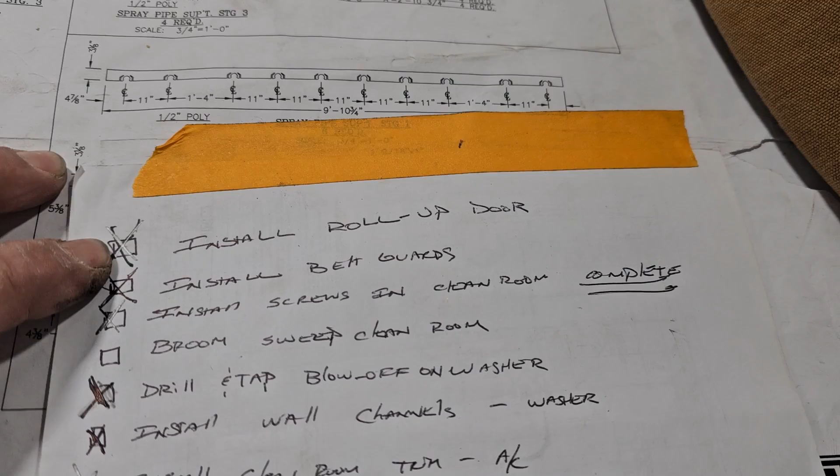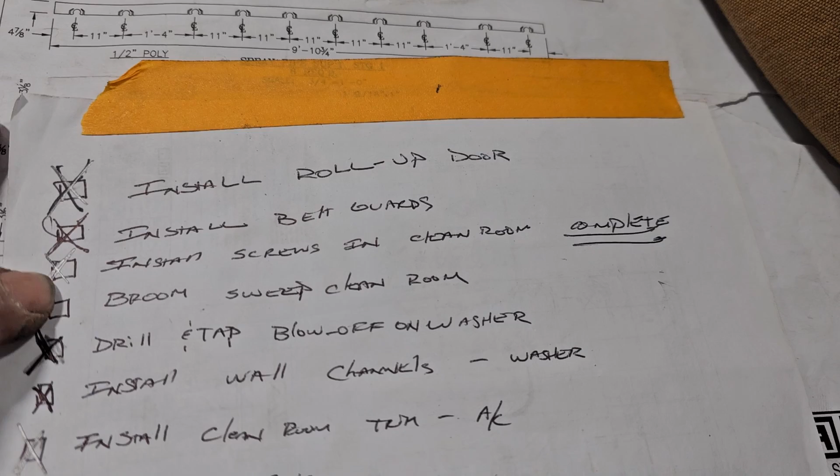And show you what the light at the end of the tunnel looks like. Well, here's one of my punch lists. You give them a square box to check off. Install roll-up door - check it off when you're done. Install belt guards - check them off when you're done. Screws and trim screws in clean room - complete. Broom sweep clean room - see, that hasn't been done. Drill and tap blow off washer. Blow off on washer, install wall channels, blah blah blah. It just goes on and on.

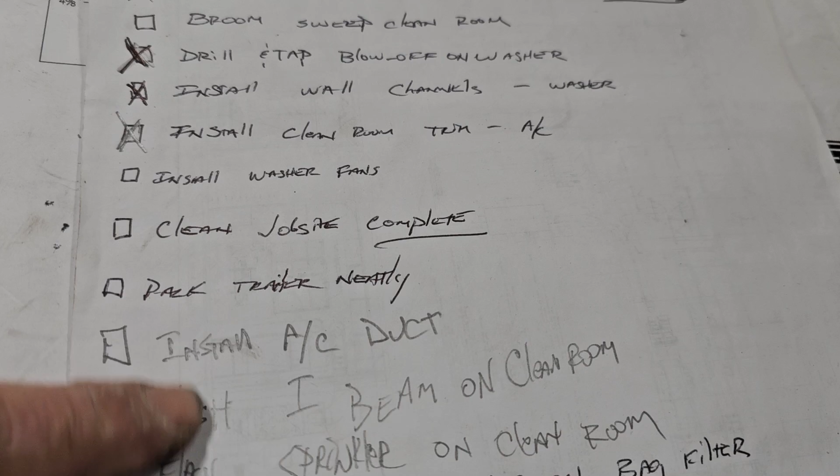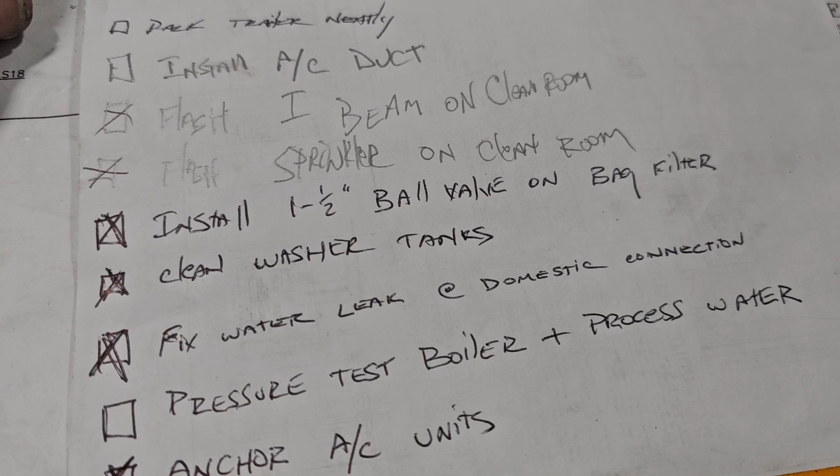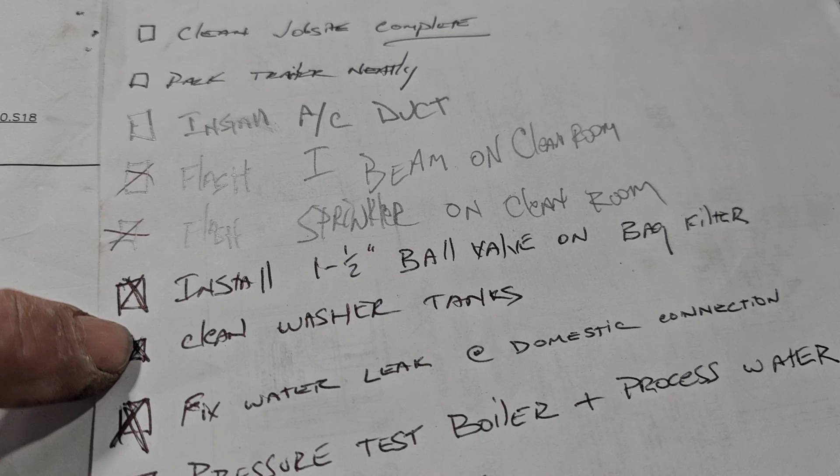And see, we add to it there - we added a couple other things. Install the AC duct, flash the I-beam on the clean room, flash the sprinklers on the clean room, install a ball valve that we forgot to put in, pressure test boiler in process - that's in process right now. Anchor AC units. We had a water leak at the domestic water connection we had to fix. We had to clean out the washer tanks, make sure they were devoid of screws, metal chips, and plastic shavings. So there's a lot of little things we had to do.

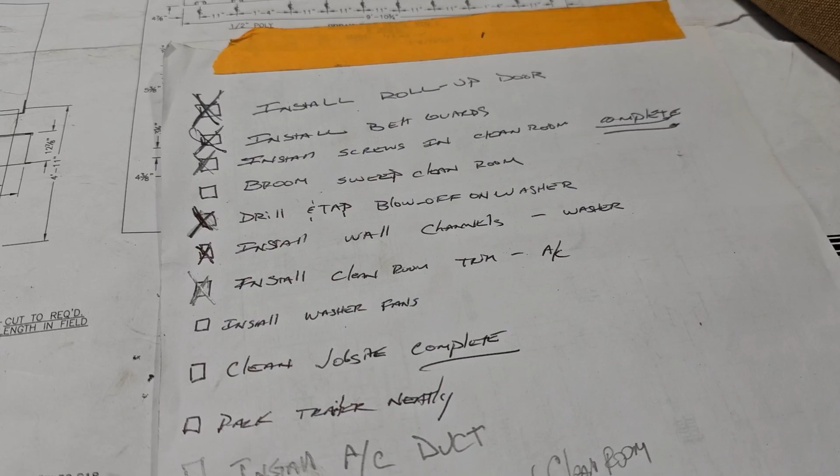So we're doing startup this week. That's how we start punch listing. But this is subject to change - I won't hesitate to add a line if I find something that needs attention. I'll add a line.

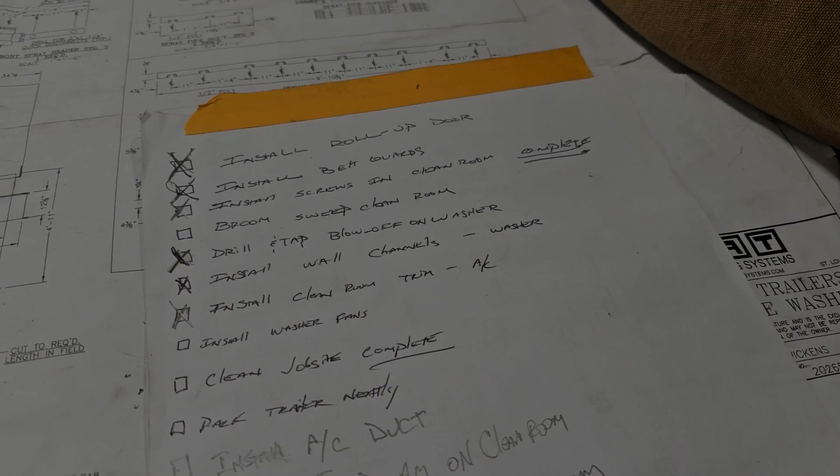Well, let's go take a look at a washer real quick. I'm going to show you what a washer looks like when it's running. We did start it - here's a little video clip of that.

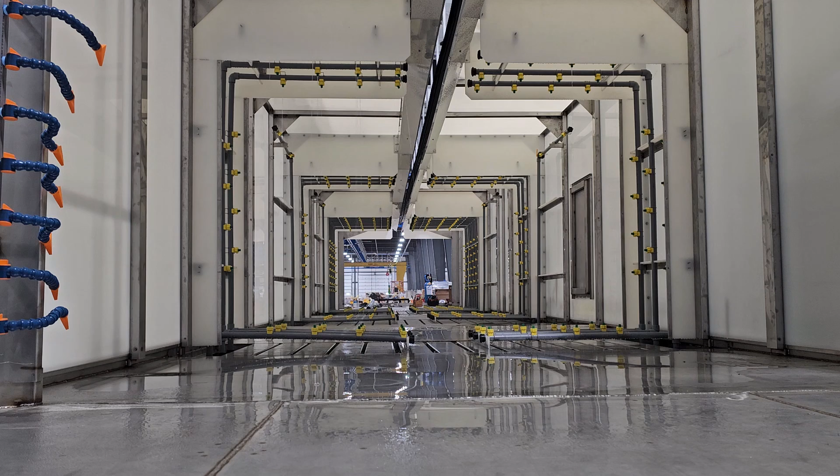You got a clogged nozzle already. Left side, in by the end cap, far nozzle. See it peeing? Yeah, the one closest to me is a little clogged too. Did you fill tank 2? We got water in tank 2? Okay.

There she goes. Is that 30 hertz? 40? That's a little weak. Is the pump cavitating? Did the water drop a bunch in the tank? It sounded like it was sucking air. Oh, running backwards, that would cause it too - they work both ways.

And now we're going to take a walk around and take a look at the process piping that we put in. We had a little sway in the process piping. Every time a high volume of water changes directions, your pipes can move, and with PVC, it'll eventually break. Even though we use Schedule 80, a really heavy gray PVC pipe, if you got some wiggle, it's going to end up breaking.

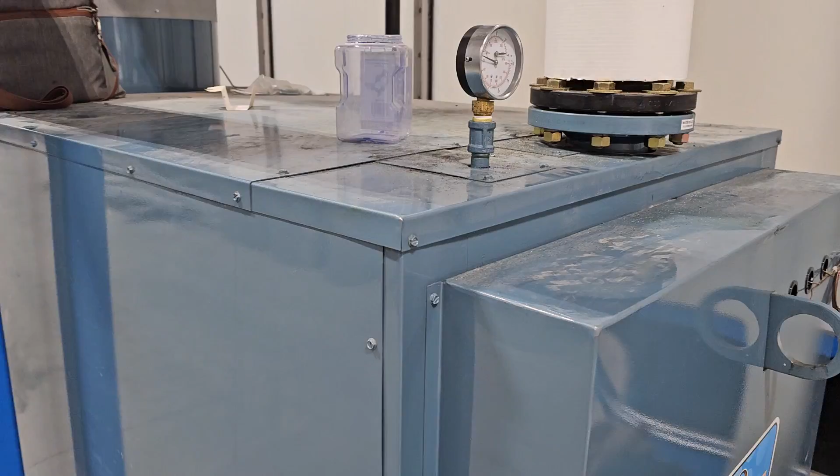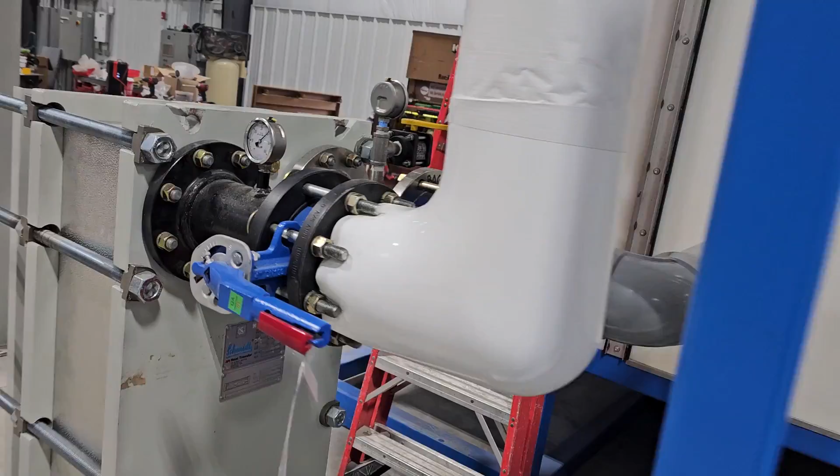So let's go take a look at how we anchored it. Okay, so we're on test here. We've got pressure in that gauge, and this is the hot side of our system. So we got pressure here, we got pressure all the way out to here, all valves are open. And we got pressure down here, valve open. So we're pressure testing the hot side. The only way to pressure test the cold side, which is the plastic over here - this is cold side - we have to start the pumps. Our pumps create the pressure in these pipes here.

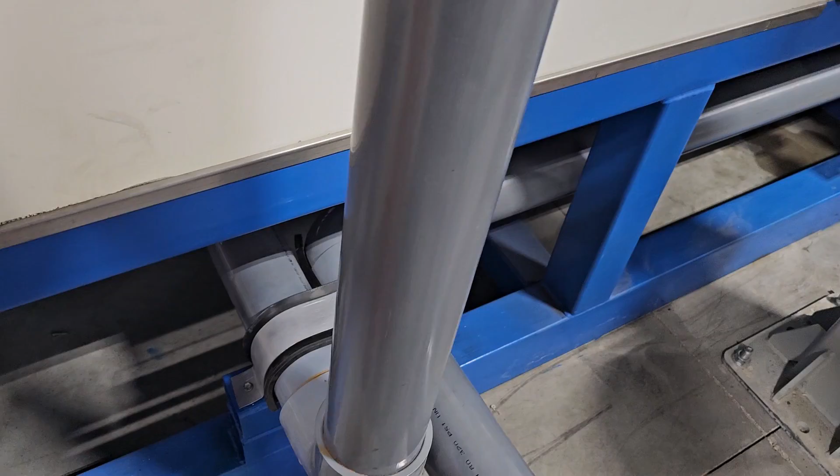But we did have some - we did start it, and we had some pipe vibration. So we made some rubber straps and stacked some blocks in there. Put a couple of square tubes in and welded them in. Some rubber strapping, same as this stuff here, and made some straps and strapped them down. We got a couple more underneath on the way across - there's two more there, and we'll walk over to the other side and show you the bag filter.

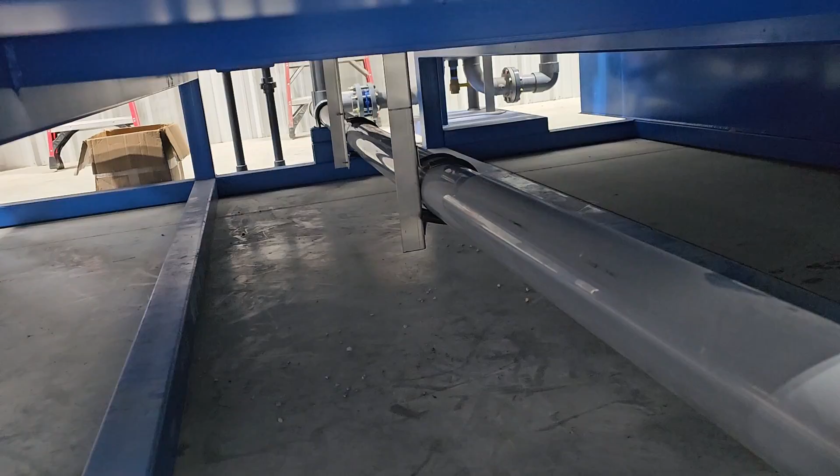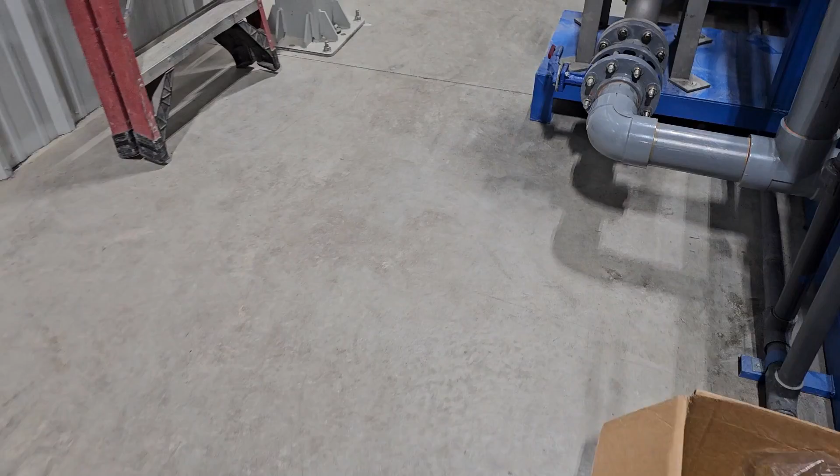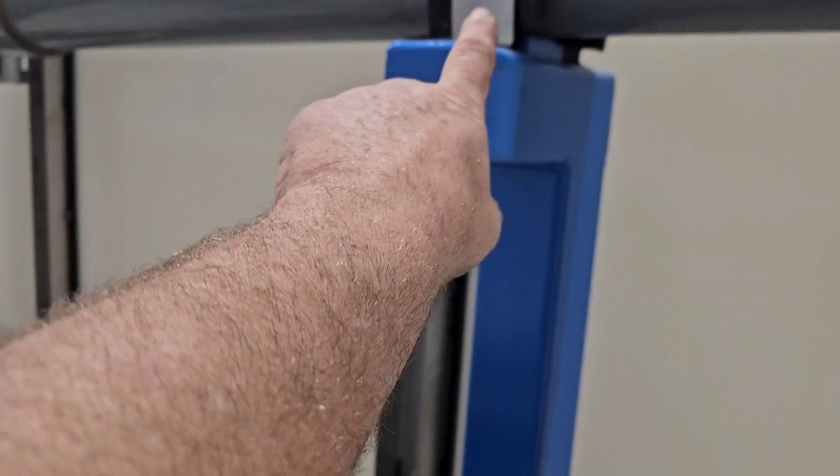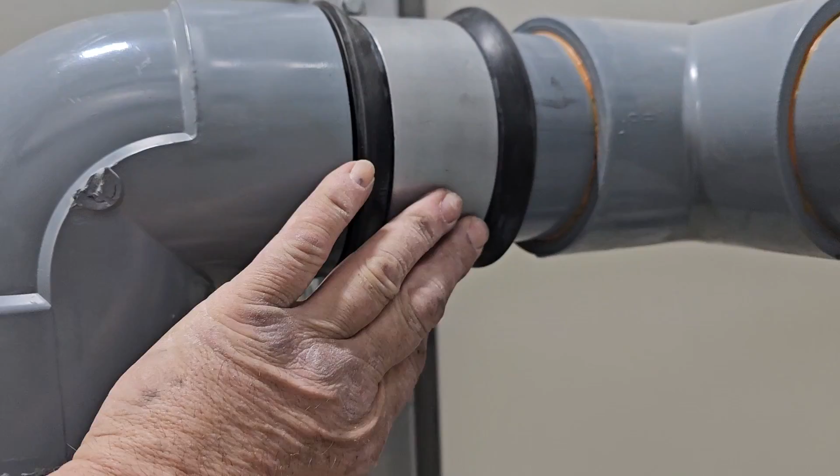There's another double stack of square tube, another rubber strap there. Got a kickstand up here, or a hockey stick, whatever you want to call it, but we put one there. And we still was getting a little bit of wiggle, so we put a couple of beam clamps back here, beam clamped it to this channel, and then we made another rubber strap there. So she's strapped down pretty good.

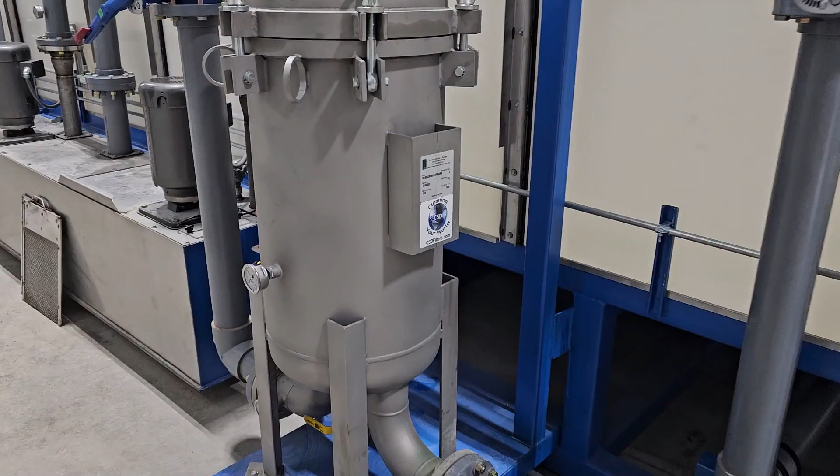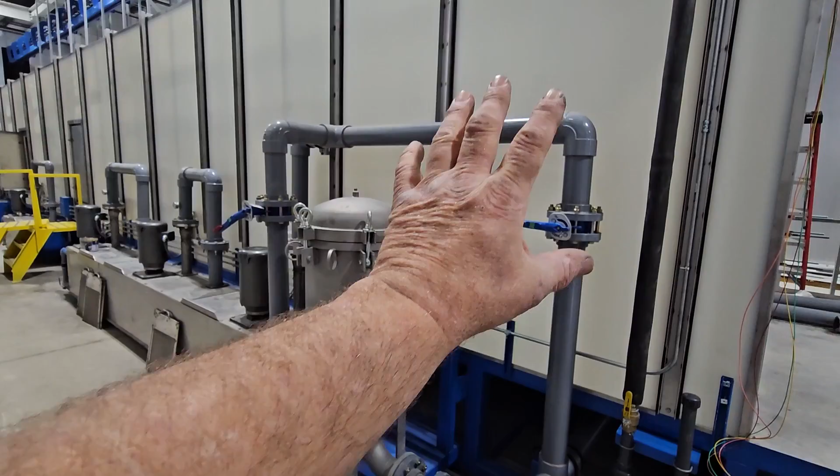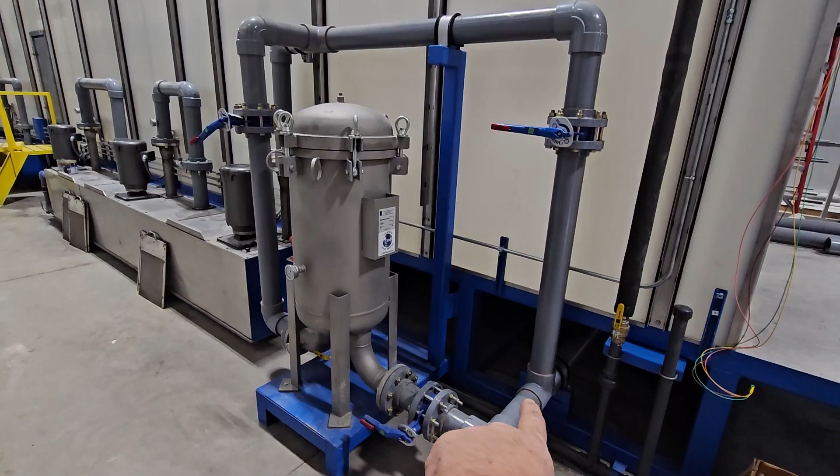Oh, there you go. But as you can see, there was a lot of overhang up here, and our process piping, when the pump was running, was moving quite a bit. Eventually you'll bust a flange or break the glue down at a flange there, or bust a T. You'll end up damaging it somewhere, and you'll end up with a leak.

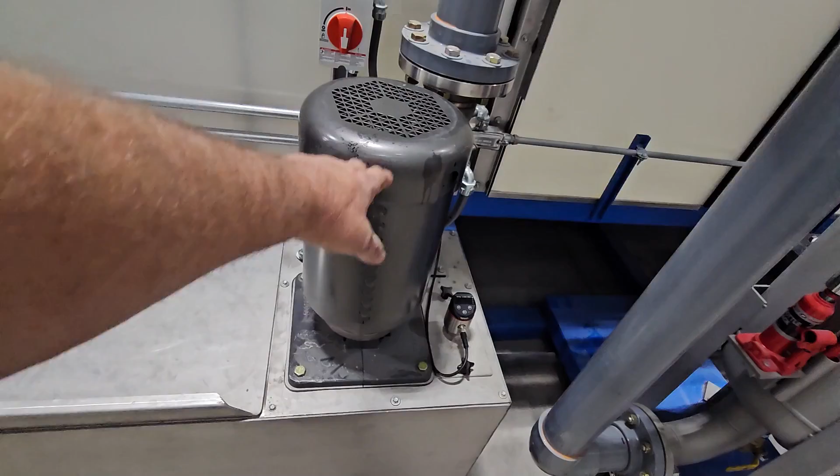But we're ready for another pressure test, and we're going to start this motor. This is the recirculation motor for the hot side, just to heat the water. So we're going to start this motor and run it probably for a couple hours and make sure we don't have any leaks. We did it. We had one yesterday. We only ran it for about 5 minutes.

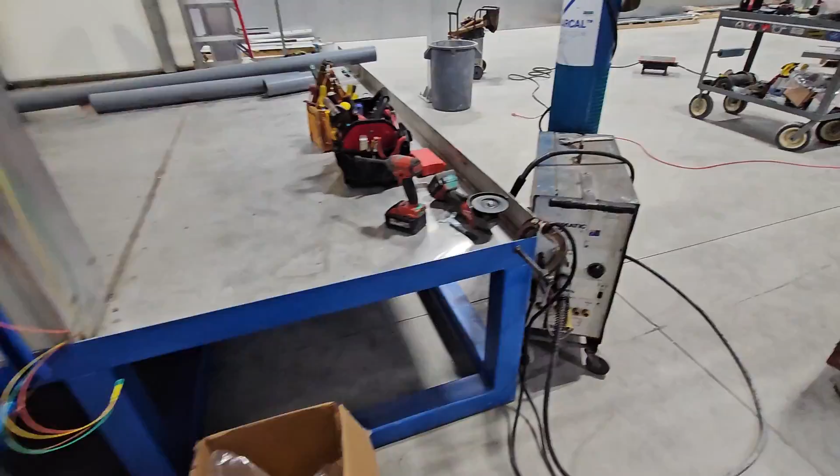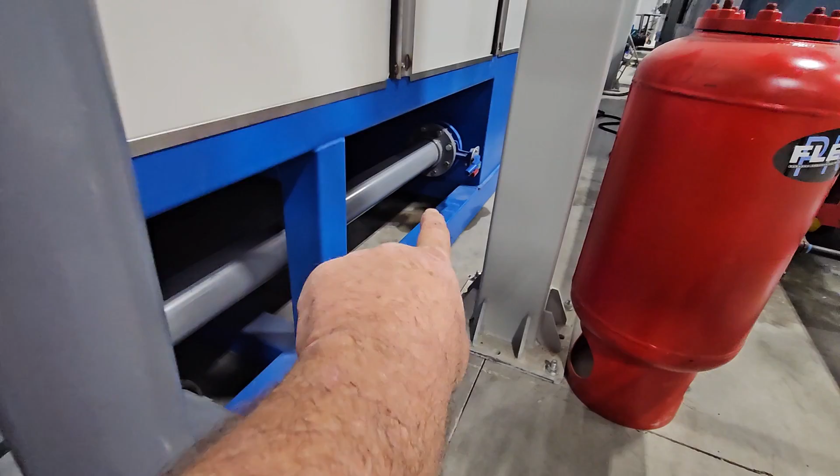We had a loose flange over at the tank. Actually, you can still see the wet on the floor, but we had that flange back there that was loose, and we had a gauge right here that didn't have any tape on it, so it stands to reason that that would leak. Those are hell to find because they drip down and run down here, then they drip down to the bottom one. You go, oh man, is it the bottom one leaking? Is it a weld? What is it?

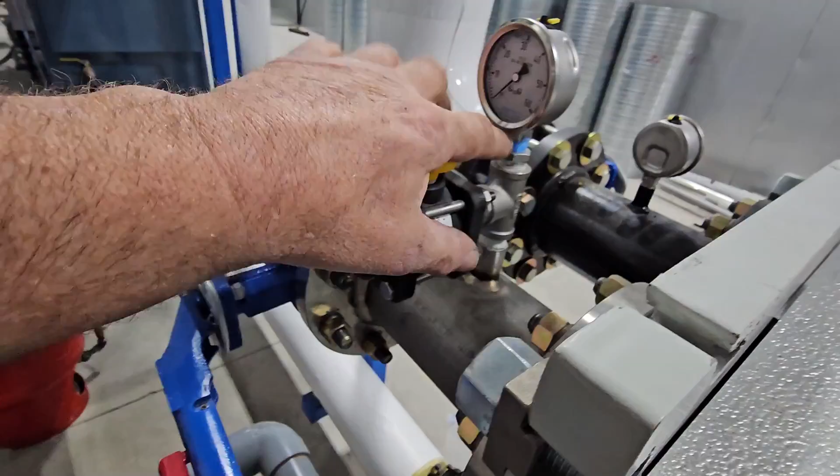So it was just the gauge was hand tight. No one put any tape on it. No one tightened it. So pressure test up next, but we got to run the pump.

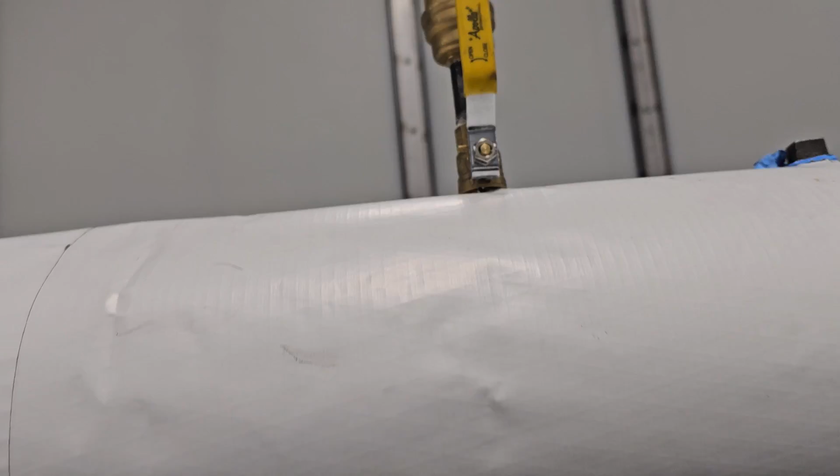Okay, so we're on a pressure test. We've got a black hose hooked up to just city water. We got a garden hose, and we brought it in, and then there's little air bleeds right here, little air bleeds all over the place, and we burped all the air out of it, and then we started this pump. This pump is currently running.

Very quiet, but pump's making pressure. And we're pulling in city water, and the pump is adding to the city water pressure. City water pressure here is about 45, so the pump adds about a 5 psi boost to that. So that's coming into the heat exchanger.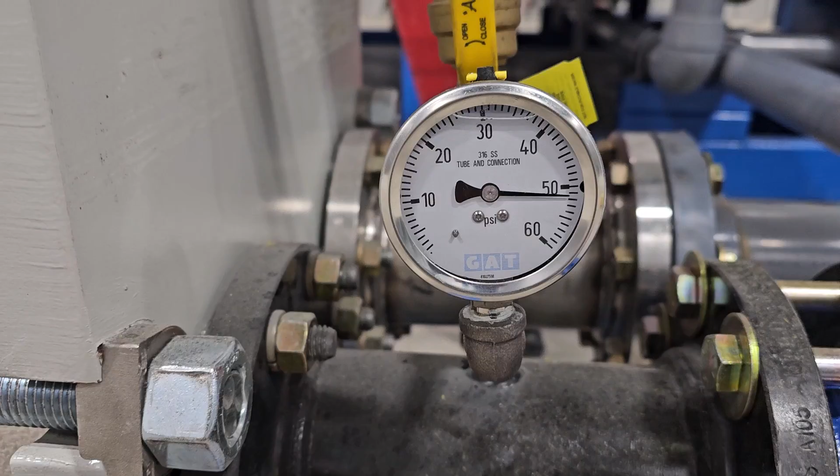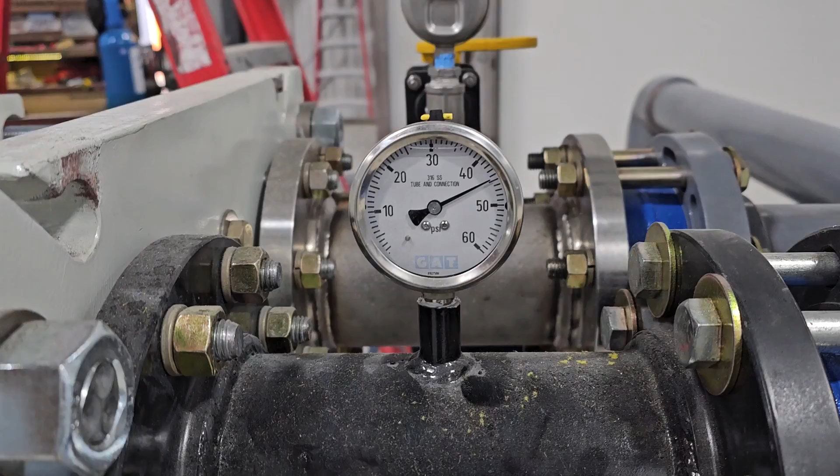We're getting just a shade over 50. I'd call that maybe 52. And then there's your pressure drop. That's coming out of the heat exchanger, and I'm going to call that 45. So you do get quite a bit of a pressure drop between incoming and outgoing. But right now we're looking for leaks.

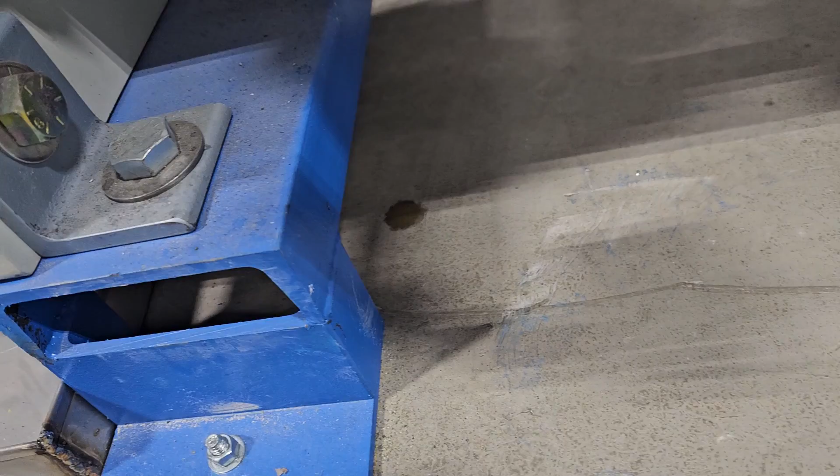If we got a leak here, if we got a bad weld fitting, if we got a bad gasket, forgot to put in a gasket, whatever, we're going to see it. We're looking for water. So like here, there's a place that needs investigating. There's one little drop there, and it might be as simple as, oh look, there's a plug there. Didn't you see it? It'd be as simple as tightening a plug.

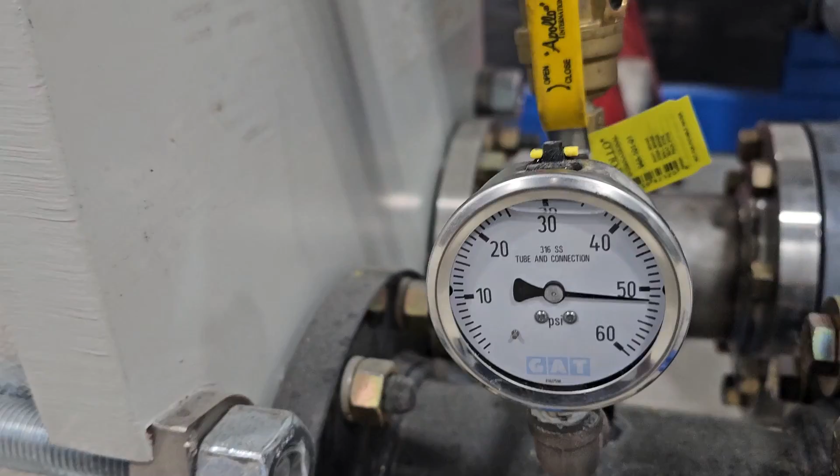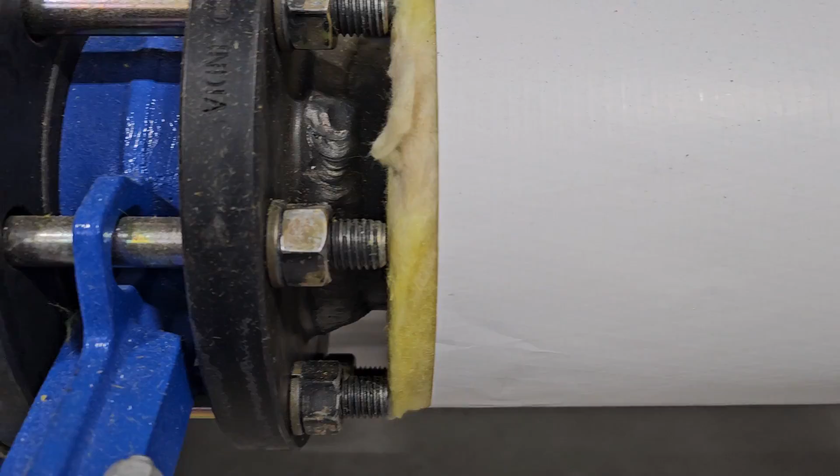Or tightening a gauge. I found a loose gauge the other day. It might be the air bleed. We can check that by turning it off, see if that leak goes away. So we just go around and get real scrutinized with it, and we check our welds in the welded pipe we put in. And with the city water hooked up and the pump running, we're burping all the air out of the boiler right here.

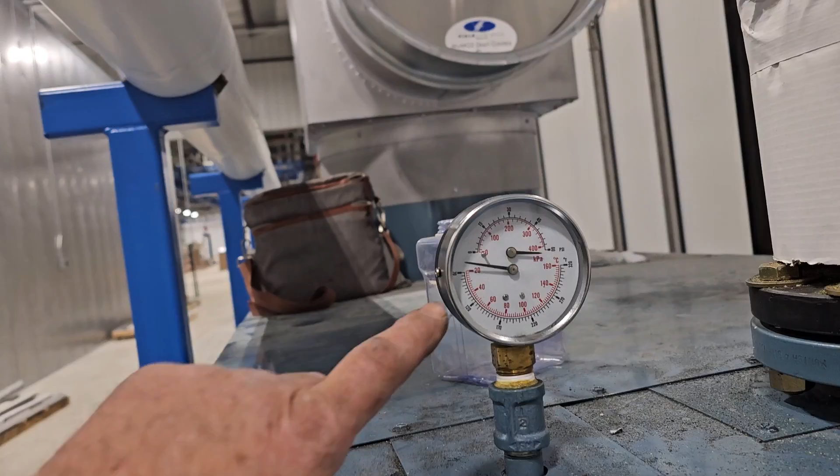So as you can see there, we got pressure up top. No boiler fire, but we're not firing the boiler, we're looking for leaks around this flange. That would indicate that we've got a weld leaking, and that could be up in our joints here or here. They'll just run down the insulation and get right there.

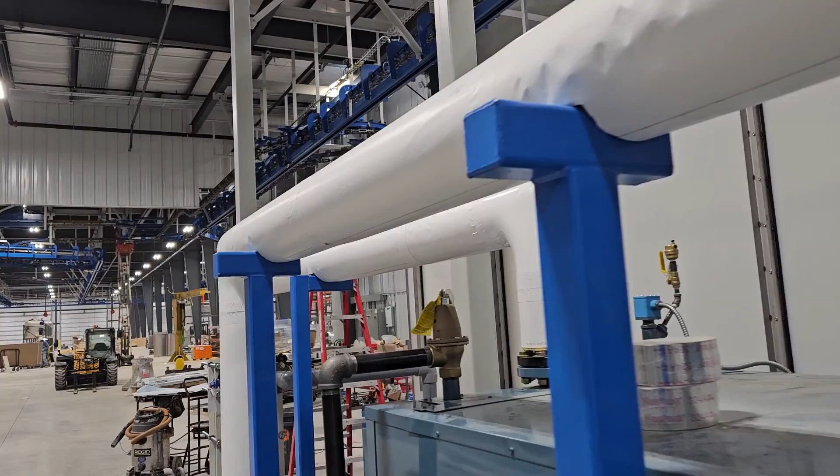We air pressure checked it, but it's better to do it with water. Get all the air out of it once and for all, and check it.

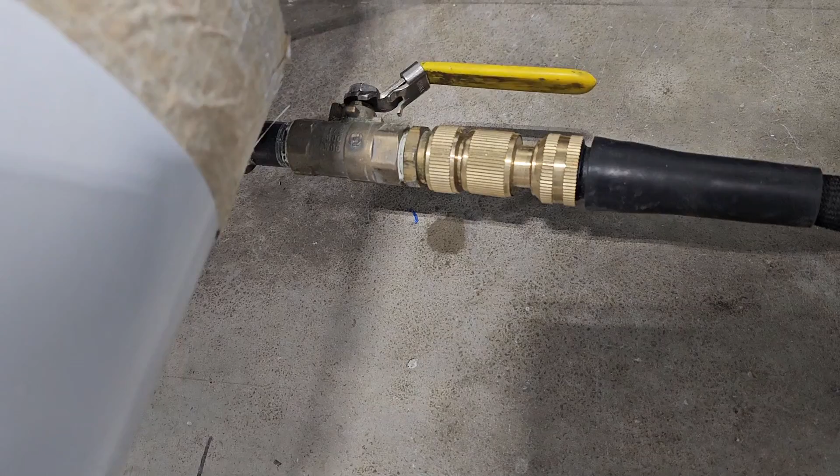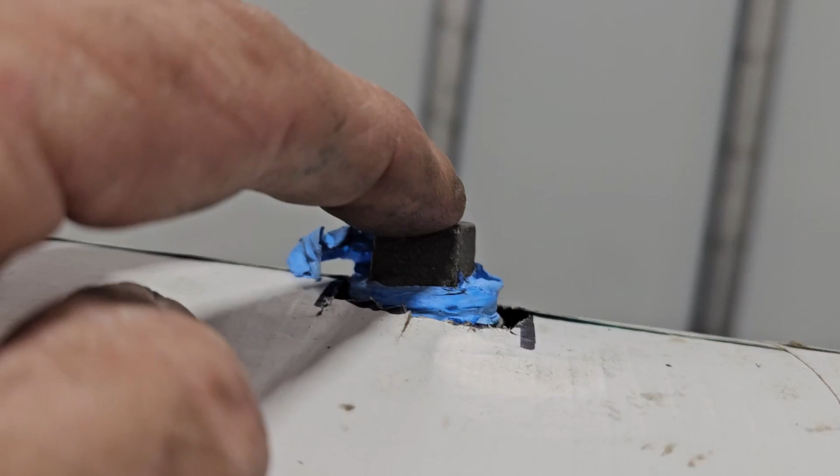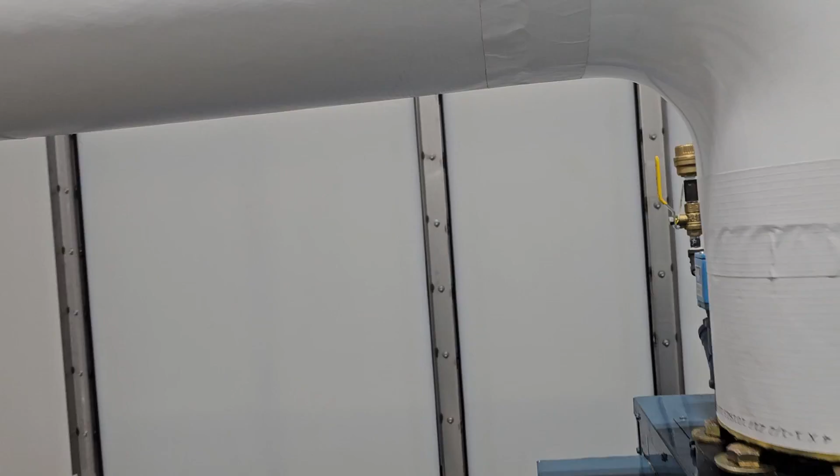See, we got a little black spot there. Oh, well, that's my hose connection. I'm not worried about that. And we did start up, see a wet spot? We started up. We forgot we welded in an extra bung right here. We're being nice guys, we left a bung in there for him. And then I left the plug out of it like I had good sense, and we fired her off. What a gusher.

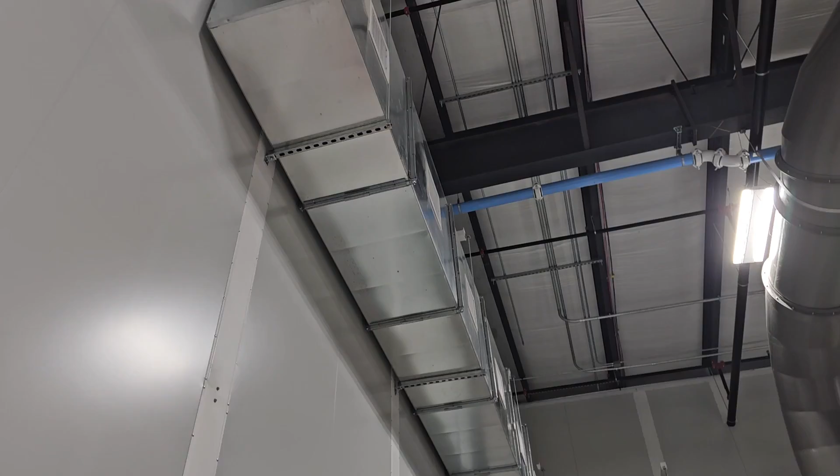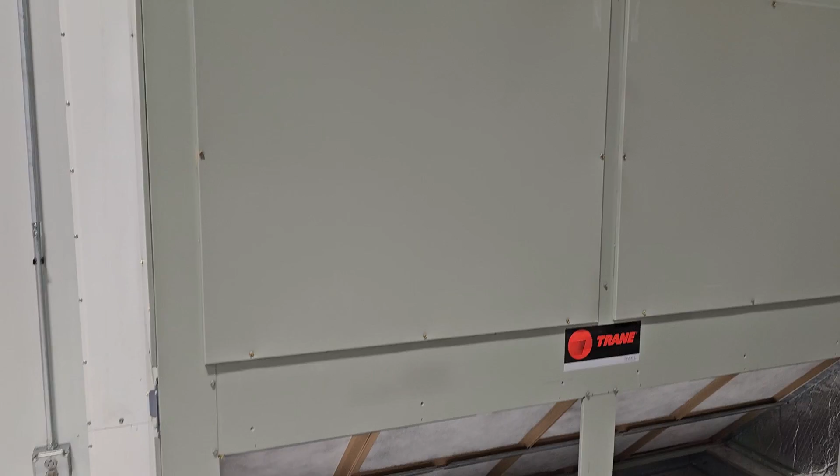Okay, well, we got the first air conditioner duct hung, as you can see, off the hockey sticks. And they're just a simple trapeze that come down under the duct, and then there's unistrut below the duct. So it's like a trapeze setup. Yeah, it just dead ends over right there. But there's 2, 4, 6, 8, 10 registers there as general dump air makeup back into the building, or just recirculation, not air makeup. And it takes its air from that V-bank right there, intake filter, so it just pulls air in there and dumps it out in the upper plenum.

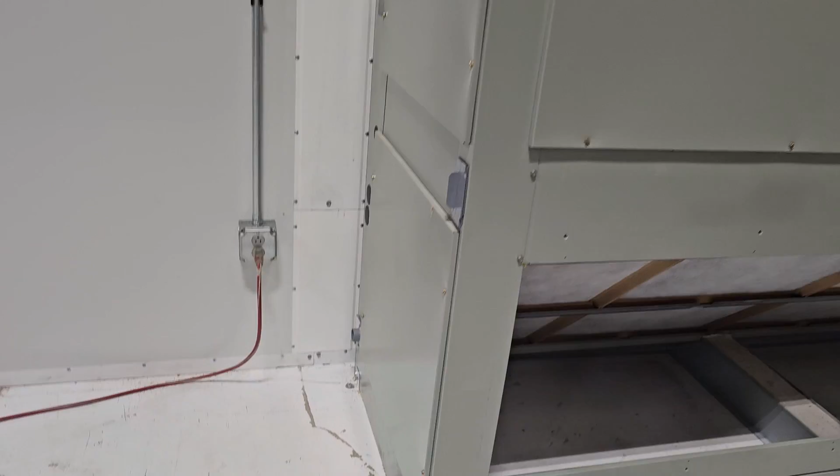And they came along and bolted it to the floor, so the AC unit is permanent there now. As you can see, my floor is filthy. This needs a sweep out and a clean out. We've still got more duct to go in around over here. That's probably going to happen today, tomorrow, whatever.

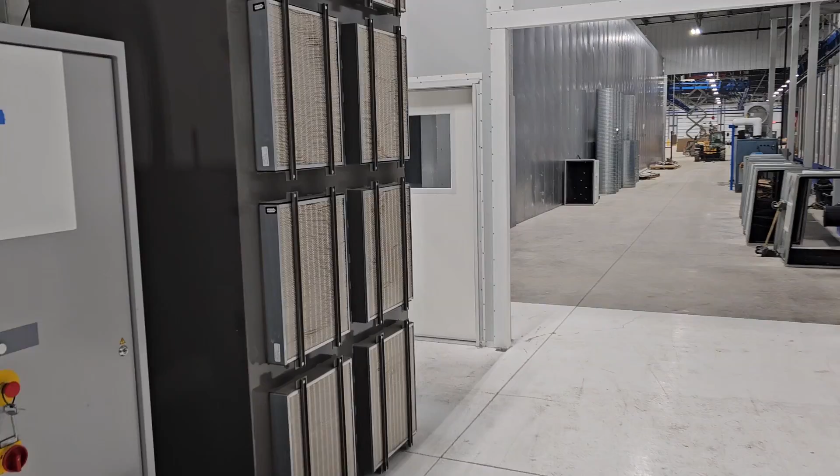Doors. That door got hung about a week ago, but I got other doors over here. So their man door finally came in, and I was able to install that one. So now we've got a man door here. Nice.

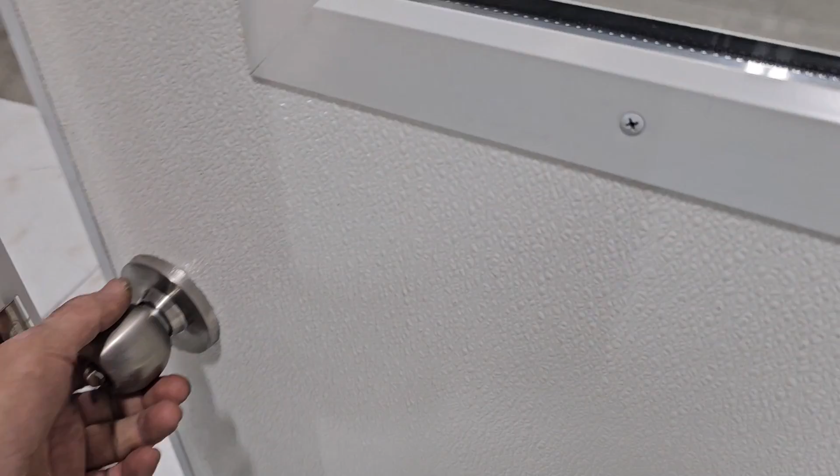I hung a cord down the other side. Oh, it's the cord for my roll-up door. We got temporary power supply right here for this roll-up door here. And this is one of those like a forklift door for a meat locker. It's not a steel door, but it's a vinyl door. Very quiet,

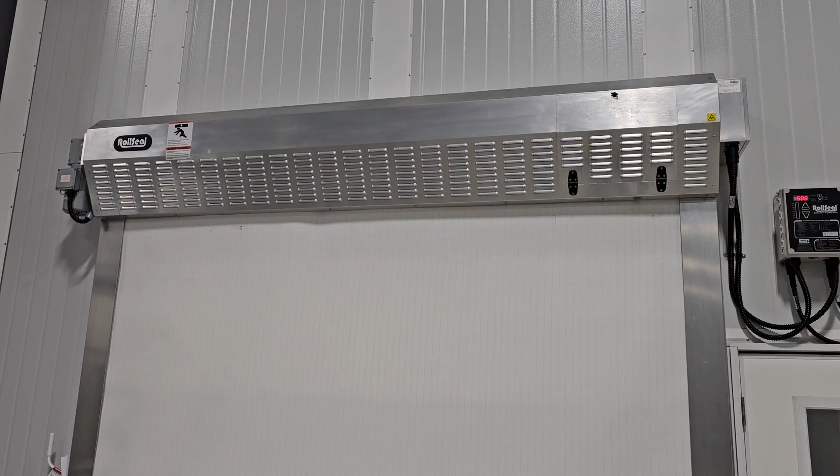Reasonably fast. And it was all aluminum construction. The whole thing's all aluminum. And this is just a sheet of vinyl, like a heavy banner or tarp or something. So, but they call it a RollSeal. So it's actually a sealed door. So they use those in, like, walk-in refrigerators and meat lockers and stuff like that. But for getting forklifts in and out, it's pretty quick.

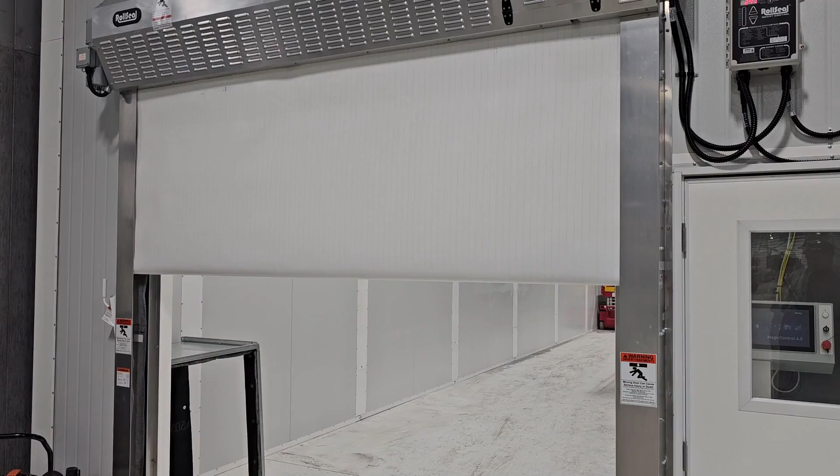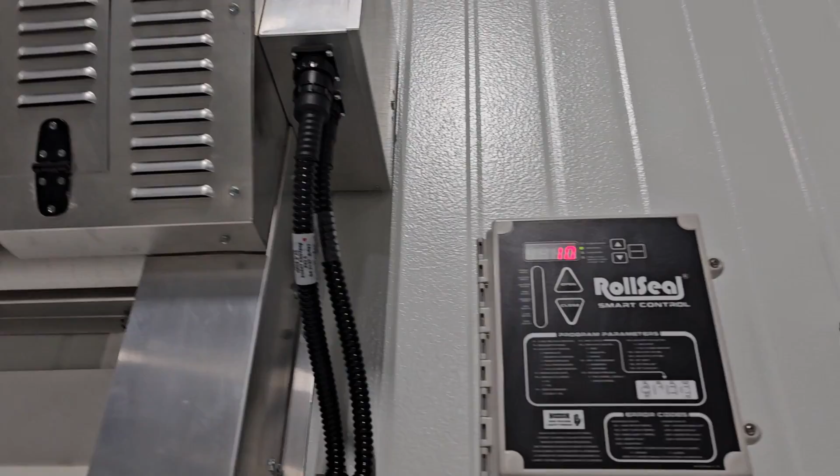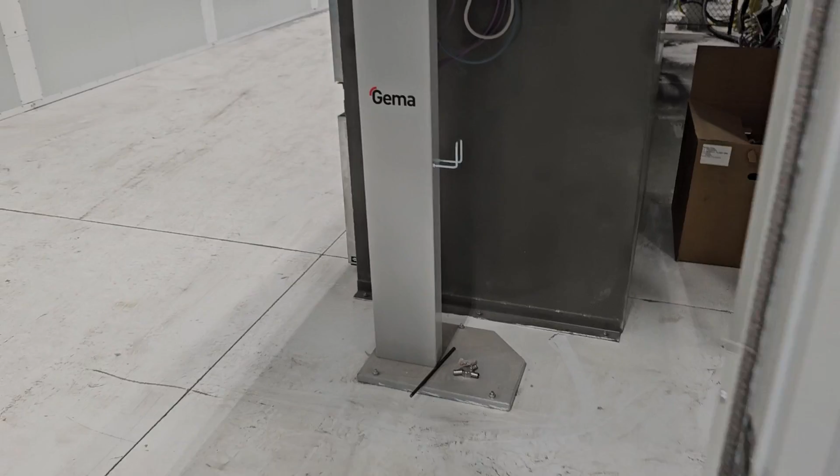Click. And it's plug and play too. Everything plugs in. There's Amphenol connectors. It comes with a driver board. It's already pre-programmed, you only have to set a couple of things. And then there's a power supply there, and they give you a temporary cord. I just got it plugged in temporary, but they give you a temporary cord to run it, and then that gets hardwired later. But they even give you the start, stop, push buttons already pre-wired. All you do is mount one on the wall, poke a hole in the wall, and put your other one in. Pretty slick.

So RollSeal, it's only like the second one I've ever put in, but super easy, very lightweight, no drum to hang. Literally the whole thing, you build it on the ground and just stand it up and screw it to the wall.

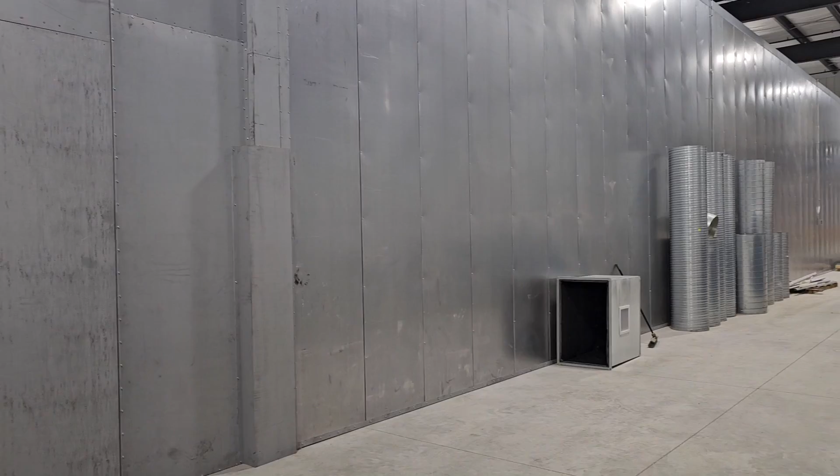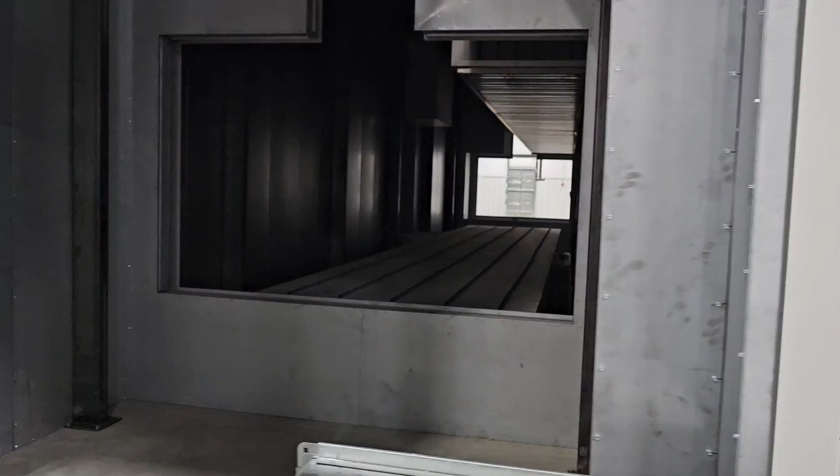Last night we got the big oven into high fire. We don't have any roof vents done yet, so we didn't want to run it for too long, but we did get her into high fire, and we know it'll make it there. So we know that. This oven here is currently running. I smell something. No, she ain't making heat yet. That's the actual temperature inside the oven. But no, that one's just getting started up right now.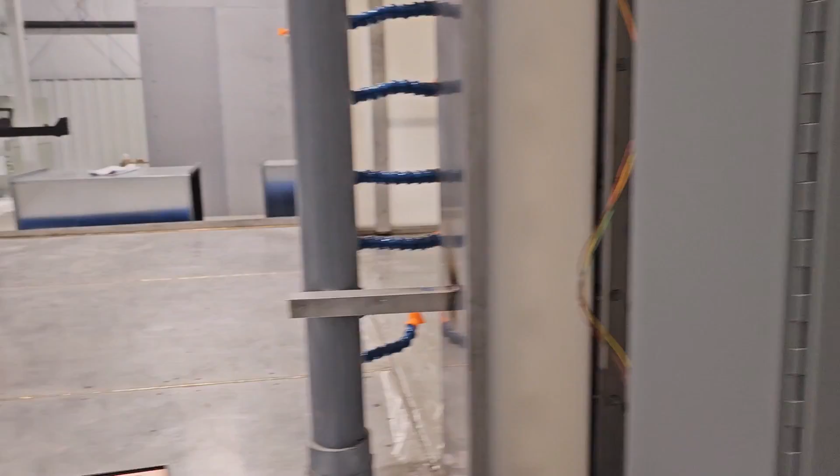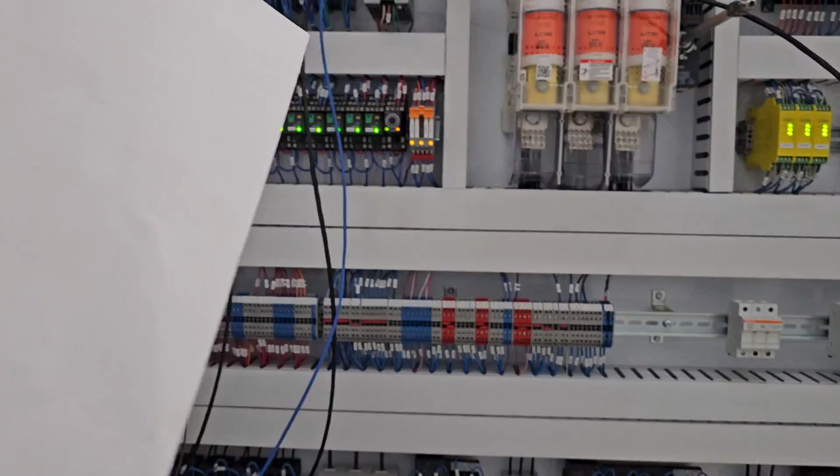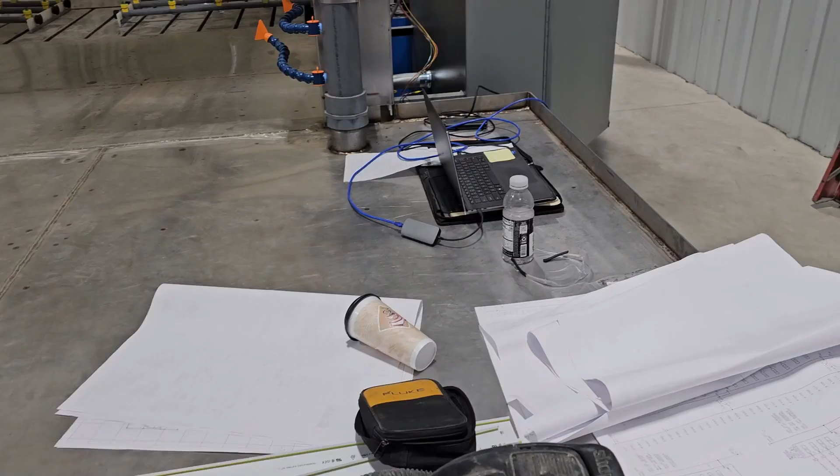And this is all PLC controlled. We established a link via Cat5, this Cat5 cable right here. We had to put that in, I think yesterday, to establish a link and link up the two ovens and get something going over to GAT. So there's some guy sitting at a desk over in St. Louis tweaking stuff here in Indiana.